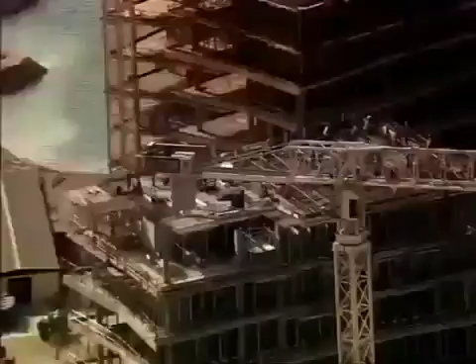Abu Dhabi, the richest city on the planet. It wants to join the City Super League and is undertaking an incredible transformation, building this extraordinary skyscraper, Aldar HQ. Nothing like it has ever been attempted. It'll be a race against the clock. Will this megastructure push even Abu Dhabi to the limit?

Abu Dhabi is in the midst of a construction boom. It's the largest of 7 sheikhdoms known as the United Arab Emirates. Its capital, also called Abu Dhabi, is the richest city on earth. Its ruler, Sheikh Khalifa, has a cool $875 billion in the bank and an audacious spending strategy to match. He wants to transform the skyline and compete with the international elite of London, New York, and Hong Kong.

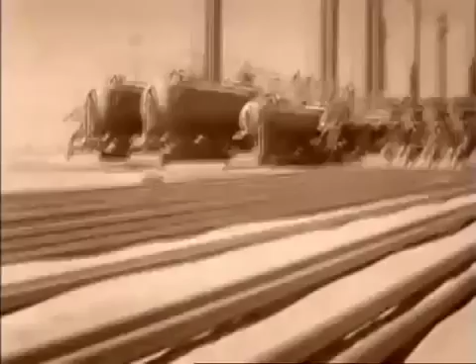But this is not the first time the Emirate has stood at the crossroads. Just decades ago, Abu Dhabi was a desert backwater, until the discovery of oil in 1958 brought unimaginable riches to its ruler, Sheikh Zayed. As the petrodollars flowed in, he converted the shell houses into high-rise, and the traditional way of life was swept away.

Today, Abu Dhabi is a thriving metropolis, sitting atop the world's 5th largest oil reserve. But black gold alone cannot put this city in the Super League. To do that, Sheikh Khalifa must lure big business and tourist dollars. Abu Dhabi must expand to thrive.

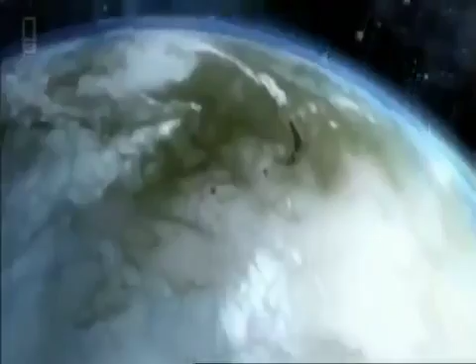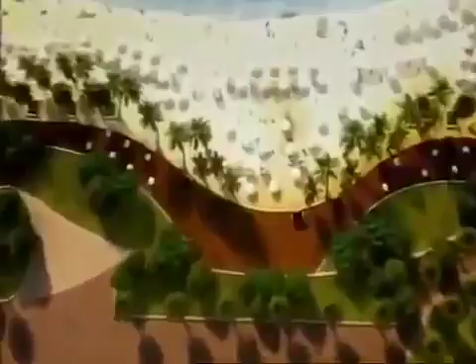To put Abu Dhabi on the world map, fledgling property developers Aldar plan a whole new micro-city, Al Raha Beach. It's an ambitious proposal. At 11 kilometers long and almost a kilometer wide, this city on the sea will be the biggest project ever attempted in Abu Dhabi's history. Mohammed Al Mubarak is in charge of delivering this audacious development. The vision of their highnesses and the vision of Aldar was to create this almost mini city where people can live, study, play, and work in one destination.

Al Mubarak must attract investors if Al Raha Beach is to succeed. So to launch the project, he commissions a signature skyscraper. Creating an iconic structure on Al Raha Beach was of vast importance in basically putting Al Raha Beach on the world map. Al Mubarak sets Lebanese architect Marwan Zgheib the task of designing an icon that raises the stakes even higher. The building will become Aldar's headquarters in the heart of their colossal development.

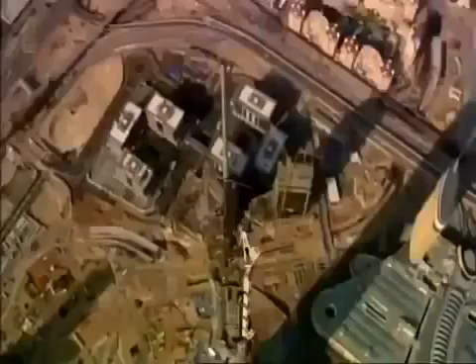But creating something new in a land where the iconic is the everyday won't be easy. Neighboring Emirate Dubai has taken center stage with a number of headline-hitting projects. The world's tallest skyscraper, Burj Khalifa, the Palm, and the World, and the emblematic Burj Al Arab. To stand out from the crowd, Zgheib knows he must redefine the extraordinary. Simple can be powerful sometimes, and especially in architecture. You can see it since the pyramids of Egypt. Most of the iconic buildings are very simple buildings.

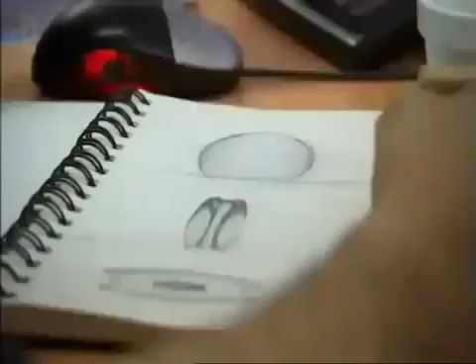But it isn't until Zgheib is relaxing on a plane that he has a brainwave. But I couldn't sleep, so it was a moment of relaxation, you know. And then the idea came simply. So I took a pen and I drew it on a sketchbook. The design is simple but daring. A round skyscraper taller than the Statue of Liberty, with a curved glass skin covering the area of 4 football fields. To be honest with you, the moment I imagined it, I knew it was a winning concept. I knew it was something different.

In fact, the design is so unusual, Al Mubarak initially doesn't know how to react. When I first looked at the MZ design, I was a bit confused in the beginning, to be honest with you. I felt like I was looking at a comic. I felt that this was a flying saucer and basically it landed on Al Raha Beach. And I just kept on staring at it for like another 15 minutes. And after 15 minutes, I just fell in love with it.

Zgheib's design is inspired by nature. 2 giant circular curved walls of glass mirror an open clamshell. Architecture is nothing but imitation of nature. At the beginning, the idea was so geometrical, very pure. It's like a seashell. The seashell has deep meaning for Abu Dhabi with its seafaring heritage. But a circular design poses a problem. Just like a coin that stands on its edge, it risks being unstable. The circle must be balanced.

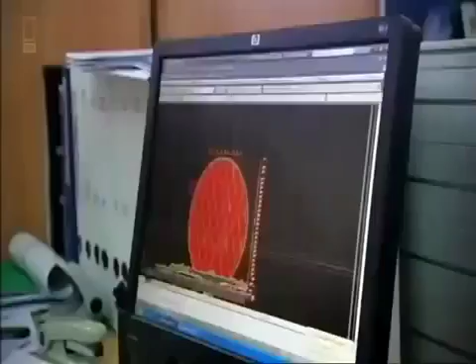So Zgheib turns to some very old-school geometry. The real challenge of the circular facade was to find the 2 points where the building should pose on the ground. And for that, I had to go back to one of the oldest rules in architecture, proportion. When you have a circle, you can divide it into a pentagram.

And that pentagram, in fact, is a representation of the cosmic body of the human being. So you can put a man in that pentagram, the man and the universe. So the pentagram will define the 2 points of the circle where the facade will lay on the ground. And this will create the perfect balance.

It was the same thinking that led 16th century philosopher Heinrich Agrippa to draw man as a pentagram inside a circle, and has helped architects to proportion buildings for centuries. But it's not the skyscraper itself that poses the first major challenge. It's the proposed site. They wanted to show me the site, but all you can see was the sea, nothing but the water.

Unbelievably, the solid ground required for Aldar HQ does not yet exist. The desired location is 700 meters out in the Persian Gulf and 8 meters underwater. New land must be created. Over 3 million cubic meters of sand must be found. Surely a simple task with Abu Dhabi's endless desert dunes. But desert sands are too fine to build with. The land would just slide into the sea. Marine sand is needed. Its larger grains help it stick together, creating the perfect base to build on.

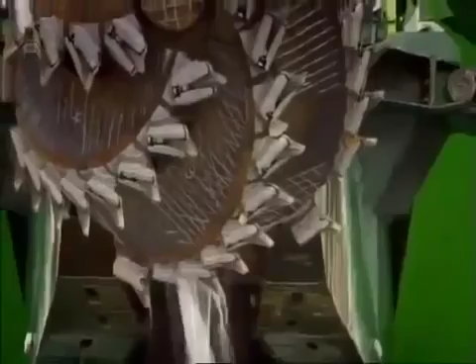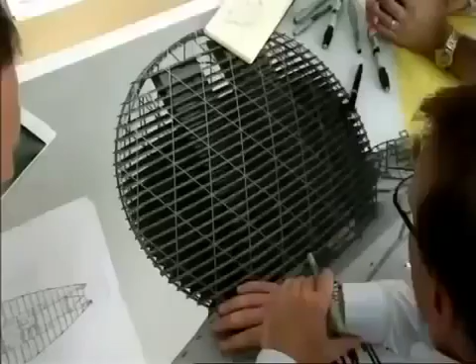We mapped out the program and I realized that basically from this blank sheet of paper we would have to start piling within 1 month, which is absolutely unprecedented for any building, but certainly a building which is of a unique geometry. Aldar want their skyscraper completed by an astonishing deadline. In just 30 months' time, the eyes of the world will be on Abu Dhabi when it hosts its first Formula One Grand Prix.

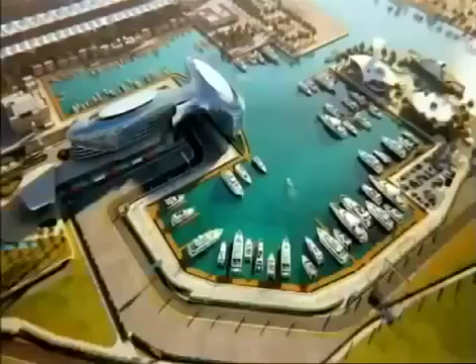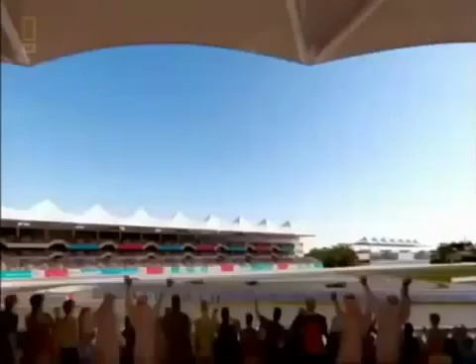The racetrack will be on its own designated island, complete with hotels and theme parks. And Aldar are building the lot. The international press and tens of thousands of visitors will descend on the city. It's the ideal opportunity for Aldar to showcase their new HQ. But to stand any chance of meeting this target, the team will have to pull out all the stops.

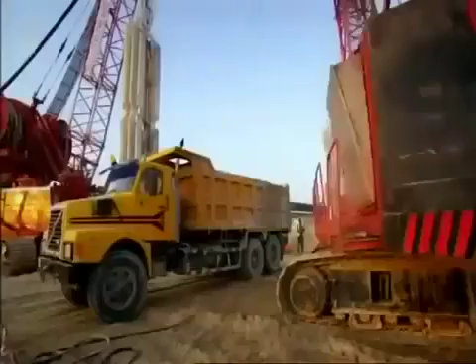Just 1 month after design has started on Abu Dhabi's round skyscraper, the construction team arrive on site to begin foundation works. For construction manager Miles O'Sullivan, the schedule is a shock. With the design not complete and being told you're going to pile in 1 month, almost crazy. But it's not just the first deadline O'Sullivan has to worry about. Aldar HQ's round curved shape presents an enormous sail-like area when wind strikes. Wind tunnel tests must be done to prove the foundations can take the strain. But the results won't be back until work has already started.

Abu Dhabi is regularly hit by high-pressure winds that sweep in from the Persian Gulf. But building Aldar HQ so close to the sea will put the foundations under another kind of pressure. Digging for Aldar HQ is very similar to digging here in the sand. What you get as you dig down is you'll get to see the groundwater starting to surge through the sand. And in fact, it's that groundwater coming through the sand here that's creating the pressure and obviously creating the issues for us when we do the construction.

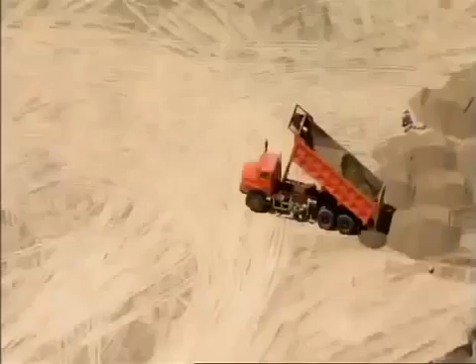The upward pressure of the water and the loose sand pose a problem for foundation construction. Before excavation can begin, the team must build a solid barrier called a diaphragm wall or D-wall. It's a concrete barricade formed of interlocking panels which socket into the bedrock and reach 16 meters below the surface. The D-wall holds back the loose sand and the surging seawater, ensuring the ground inside the barrier can be removed. These areas here, what are these?

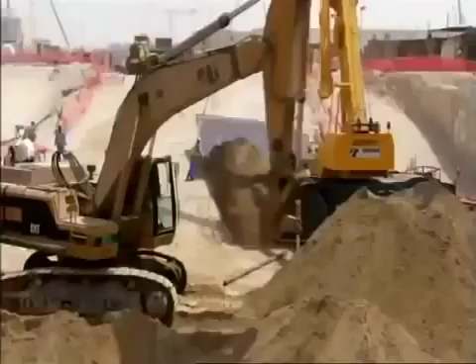The D-wall must be built before the foundations can be laid. But with the blueprint above ground a work in progress, the team can only hope that over-engineering the foundations will make them strong enough. The design calls for about 400 concrete piles that work in 2 ways. Half of the piles rely on friction with the ground to secure the structure to the rock and sand below, whilst the remaining piles drive deeper into the rock to dissipate the building's immense loads into the ground. On site, D-wall construction begins. It's the same process ongoing at this Abu Dhabi construction site.

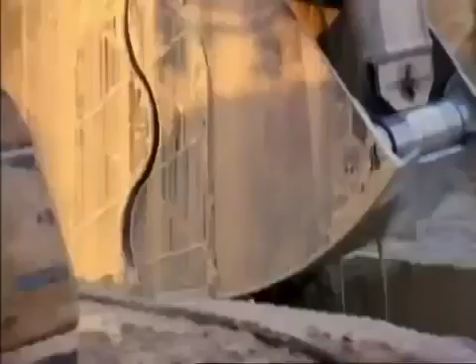Until recently, Al Raha Beach was just a vision for Aldar's Mohammed Al Mubarak, but the dream is slowly emerging from the sea. Seeing that land come up, seeing the amount of work and the amount of staff we had on the ground to make sure that was going to be done, that was like watching Rome being built.

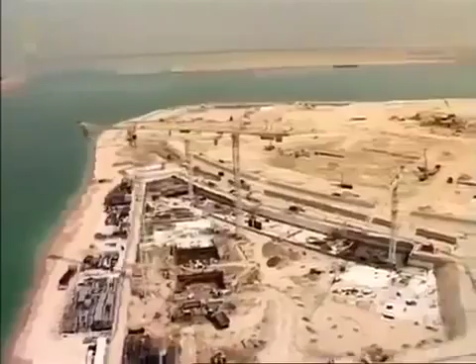The D-wall and concrete piles create a firm foundation upon which to build Aldar HQ. But the force of the sea pushing up through the sand still poses a threat to the skyscraper.

A great way of demonstrating the problems we faced at Aldar HQ with the groundwater is in imagining that this bottle here is Aldar HQ. And as I push the bottle down, you'll see forces are exerted on my hand. And in fact, that's the groundwater trying to push the building out, trying to push Aldar HQ out of the building site.

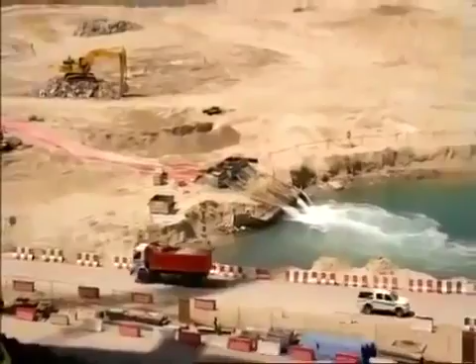To keep the site dry during construction, water is sucked out of the sand and pumped out to sea. But that's only a short-term solution. To protect this skyscraper in the long term, the team need an extra defense. It's a giant slab of concrete called a raft.

It creates a barrier against surging water, stops the piles from punching up through the building, and acts like a snowshoe to evenly distribute Aldar HQ's 59,000-ton weight into the ground. Raft construction for Aldar HQ is 12,000 cubic metres of concrete, which is a 30,000-ton structure. It's a huge element.

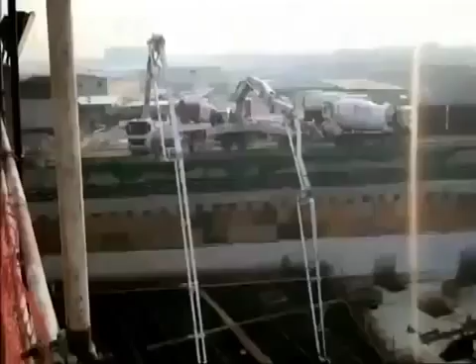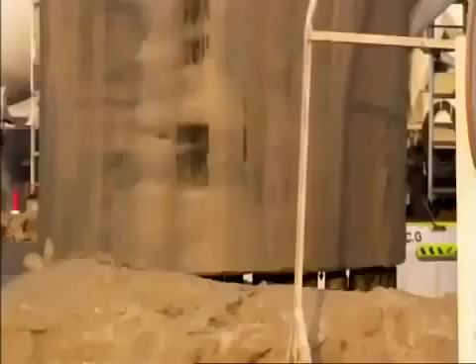With 2,000 truckloads of concrete to pour, it's a job that continues into the night. But engineers are just getting to grips with the severe forces that will affect the piles. The unique shape of the skyscraper will capture wind like the sail of a yacht. There are no guarantees the foundations will be strong enough to cope with the loads.

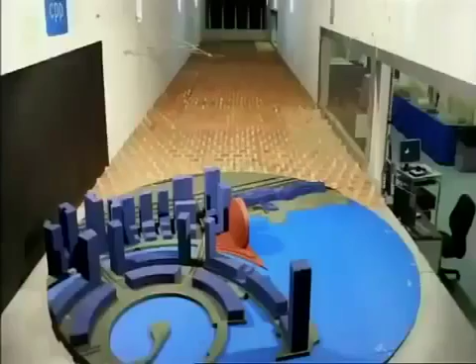The advanced construction works had to commence so quickly that we didn't have time to do the wind tunnel test. It was important that we did one, primarily because this is a unique shaped building. Gibbons calls upon wind engineer Roy Denoon in Colorado, USA. He puts a scale model of the HQ through its paces in his high-tech wind tunnel.

Right at the start, Craig Gibbons actually called me and said, "We've got something really unusual coming up. Can you take a look at it and give us your first best guess of what the wind loads might be? Give us some guidance on how to get to some loads for the foundations, because this is running on such a fast-track schedule." Knowing that Gibbons is already building the foundations, Denoon wastes no time in firing up the fans.

If the tests reveal the wind loads are higher than predicted, the foundations already in the ground may have to be redesigned. To be putting in the foundations before we could finish the wind tunnel testing, that always gives us a little bit of cause for concern. Denoon is right to be worried. He knows how high-altitude wind impacts on very tall rectangular skyscrapers. But Aldar HQ's lower height means another type of wind is the threat.

When we look at the really extreme wind speeds in the Middle East and in this region, we find that the highest, what we call gust wind speeds, the short events, are caused by thunderstorms. Abu Dhabi may appear sun-soaked, but during the spring, the intense sun heats the moist air, causing spectacular thunderstorms. Wind speeds can escalate up to 137 kilometers per hour.

The key issue with thunderstorms in this region is that they give the absolute highest gust wind speeds. Now, for the very, very tall buildings, that's not too critical because they occur down low. For Aldar HQ, they were really critical. Thunderstorm winds are strongest between 50 and 150 meters above ground. Aldar HQ is right in the danger zone.

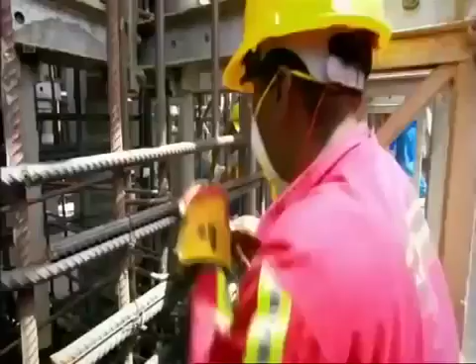Reinforced with 6,500 tons of steel, these cores will transfer the loads into the piles. But to channel these forces safely, the concrete must be cast without any flaws. They need a way to build the cores as two single pieces of concrete. The answer? To slip form.

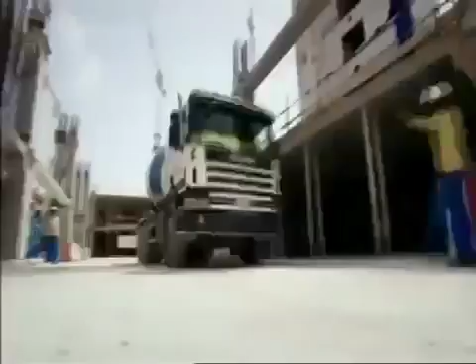It's a clever way to build big concrete towers. Liquid concrete is poured into a giant mold, which forms the shape of the structure. The mold slowly climbs up the core as it's cast, forming a single concrete tower without any joins. Seamless concrete will ensure the HQ's cores are strong. But these 125-meter backbones must be built in only 6 months.

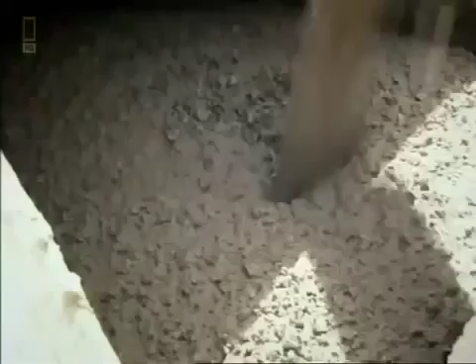It's the same process ongoing at this Abu Dhabi construction site, led by the Aldar HQ team. We are calculating how much per hour we need to climb, and then how much concrete we need to place in every hour. Slip form is fast, but on this schedule it's not fast enough. O'Sullivan has a trick up his sleeve to speed up construction. We set a challenge to both cores, who could get up there first.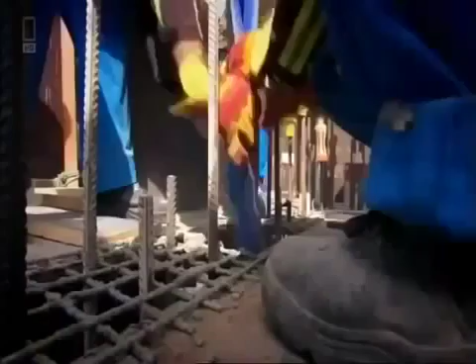The teams battle to reach each level before the other. The cores grow meter by meter under a constant cycle. The concrete is released and poured around the steel reinforcement. Hydraulics anchored to the structure raise the mold or shutter so that the next layer of concrete can be poured.

Manpower is a key focus because slip forms are very labour intensive. You need to make sure that the guys are on deck, they're there at the right time, they're doing the right works. 4 months into core construction, the two teams are neck and neck in the race to the top. Core 1's team leader keeps a close eye on Core 2's height.

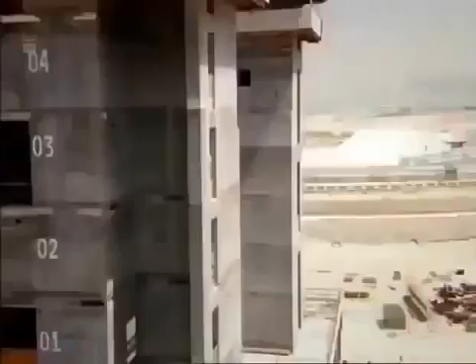It's been my benchmark, so if I'm doing better, I'll be ahead of them. So a lot of pressures are there. My boss is telling me, do this, go up, go up, go up. But it's good, the pressure is good. Core 2's leader also feels the strain. I'm working 24 hours today. I try to finish earlier than the other core.

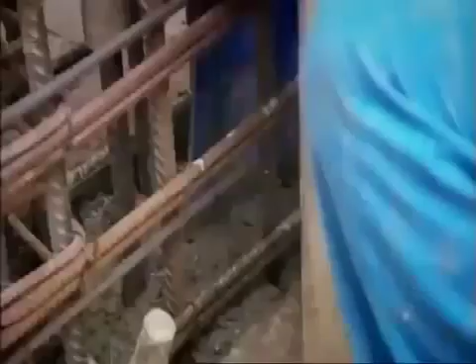Every month, the builders pour enough concrete to fill 1.5 Olympic swimming pools. But the teams aren't home and dry yet. There's still a challenge to finishing. Cores are renowned for going up quickly and sometimes having problems, so there's a lot of coordination effort that goes in to make sure that they do go up on time. We had structural steel elements to cast in. We had crane connections to get right.

After just 6 months, the two cores are approaching the top. Core 2 is only a meter or so behind, but Core 1 push ahead to victory. Core 1 won the race. It's really good to know that we're on top. For O'Sullivan, the contest to build the cores in record time has paid off.

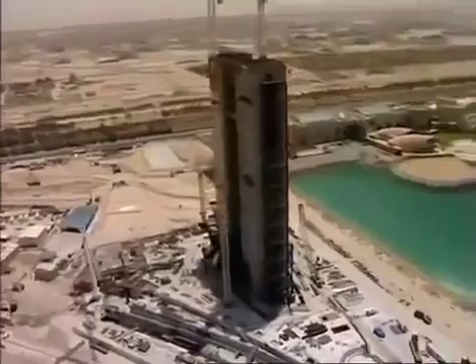A lot of planning goes into the cores. To see it come off, a fantastic feeling. But it's only a stepping stone, the core construction. There's a lot more to go on. The team have so far overcome the obstacles to bring Aldar HQ to life. But now they must face their most complex challenge to date.

1 year in, and Abu Dhabi's radical skyscraper is beginning to take shape. But with only 19 months to the deadline, the engineers must crack how to build Aldar HQ's vast external shell.

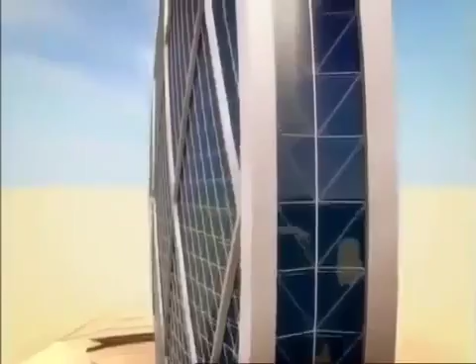The design demands a heavyweight shell to support its wide girth and survive huge wind loads. But the architect stipulates open office space, floor-to-ceiling windows, and panoramic views of the Persian Gulf. In the United Arab Emirates, the shells of rectangular skyscrapers are built with concrete.

But the geometry of Aldar HQ's shell is so complex, it must be built with the precision of a Swiss watch to fit together. On this scale, achieving millimeter accuracy with concrete is practically impossible. We knew at the outset a wholly concrete building was never going to work in this instance. And Stuart, I understand that now we've been able to get a high degree of repetition through. And there we go. The engineers need another solution.

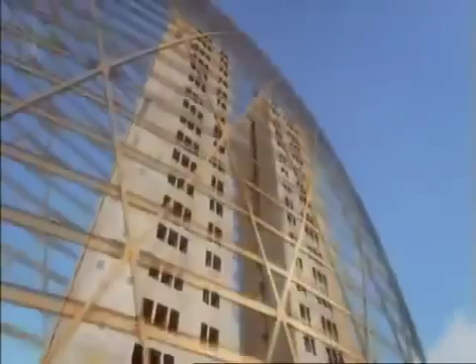The answer? A specialized steel exoskeleton called a diagrid. It's a muscular but slender steel frame that will form the HQ's unique shape and will channel forces through its high-strength beams and joints into the cores. Steel is very strong as a single element, but meshing them all together gives us this added strength and also allows us to make these rather unusual shapes.

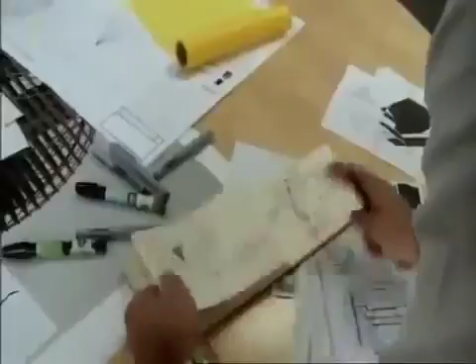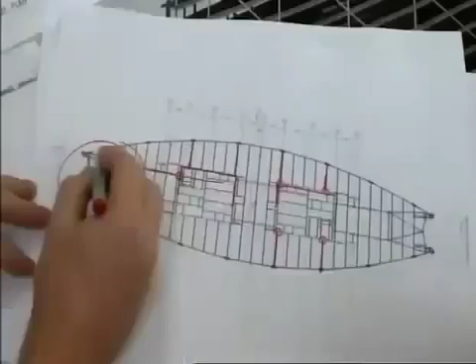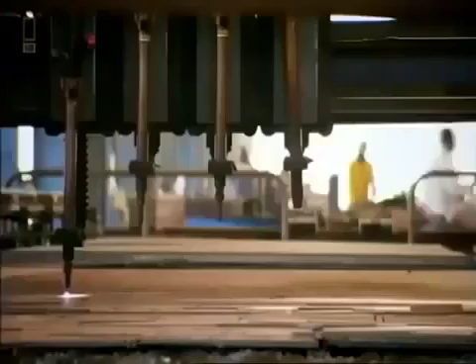It'll take expert steel fabricators to pull this job off. When we first saw the design, it was something that we knew we had to put our most experienced guys on. The structure's very, very complex. The army of fabricators work in shifts around the clock to cut and weld 2,500 tons of steel. The factory is building a series of A-shaped steel sections, weighing up to 30 tons each. They will connect together to form the structure's signature curves.

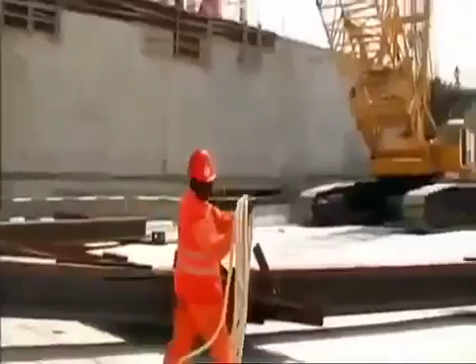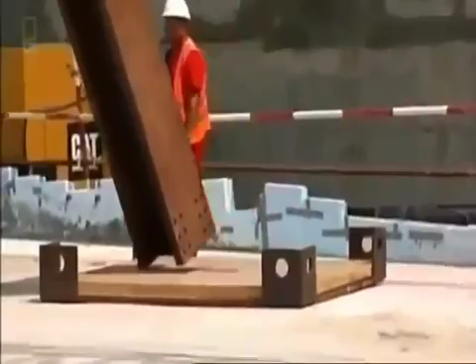But if manufacturing these giant A-frames is not a big enough job, lifting them into position on site will be a major challenge. Great to see the steel arrive for the main diagrids, the main columns to the structure. Huge sections. The thought of actually starting the steelwork some 18 months after we started the job, fantastic. But excitement of the first A-frame delivery is soon replaced with trepidation. Lifting these monsters will be a precision job, and tensions run high.

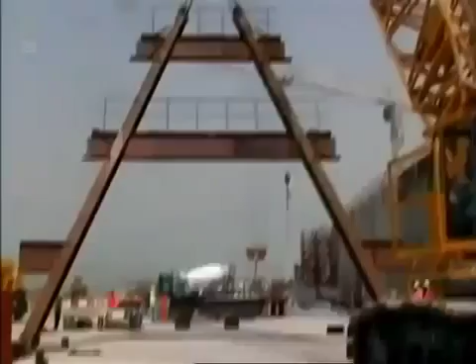When we rigged the first A-frame up, you've got to put all the chains on it. It would take maybe an hour to rig it up, and everybody's then thinking, I hope this is going to work. Everyone is on tenterhooks. Now is the moment of truth. The A-frame is lifted off the ground. There was a big ah from the crowd when it went in. The first exoskeleton section is finally bolted to the base plate. To see one go in, an amazing feeling. First A-frame up. Again, a milestone achieved, but then a lot more to go.

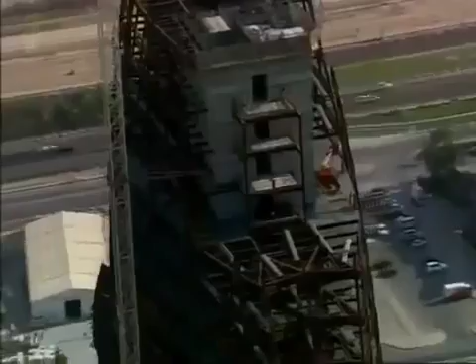Another 99 A-frames must be fitted to form Abu Dhabi's unique skyscraper. The handover date is now just 19 months away. So the team must now focus on the HQ's interior. The structure needs an alarming number of restrooms, 85 in total. This is no weekend DIY job. It'd take an army of plumbers and time the schedule cannot spare. So to fast-track the task, the team innovate again with prefabricated washroom modules, or pods.

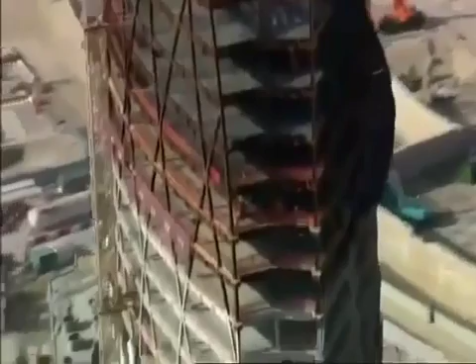A pod is a factory-made restroom, complete with lavatories, basins and mirrors, ready to plug into the building. The team plan to lift these 12-ton pods by crane and lower them into the cores like a giant game of Tetris. Construction is a finely tuned sequence. The pods have to be in before the exoskeleton blocks access to the cores.

Aldar must approve the design fast, but there's a problem. We produced a lot of visuals and graphics which we had signed off. Then we actually built the pod. We went to look at it at the factory and a lot of people thought that's it. But Aldar unexpectedly rejects the pod design. It's just too ordinary for such a futuristic skyscraper.

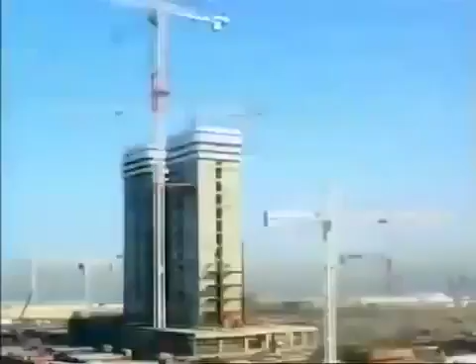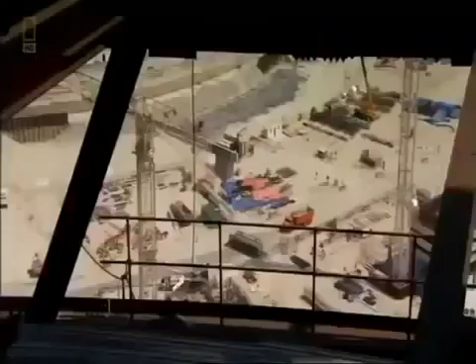It will take months to remodel, and the exoskeleton can't wait. The whole plan could go down the pan. The only option is to leave out 2 roof sections and drop in the pods later, but this has its own dangers. With zero hour looming, the team must now wrap the building's skeleton with a glass skin. And no one has ever built a glass facade like it.

The geometry of Aldar HQ is highly complex. 2 giant bowed facades cover an area the size of 52 basketball courts. A third narrow surface joins the round facades like a zipper, arcing an extreme 290 degrees from one side to the other. But curved glass like this doesn't exist. The engineers need another plan.

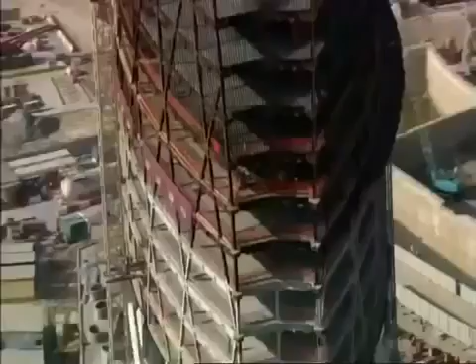The secret to covering a curved surface with flat glass is its shape. Square glass isn't an option. Squares can only bend in one direction at a time without distorting. Aldar HQ needs triangles. They can pivot on 3 axes and seamlessly join with their neighbors. To form these complex curves, it'll take 25,000 individual panes.

But before glass production can begin, the team must know what wind pressures it will face. It's back to wind engineer Roy Denoon, who must test the design in his wind tunnel. When we first saw the design, we knew there was some potential for some quite high glass design pressures. If you under-design a pane of glass, then it will be sucked out the building. The large facades are most likely to cause trouble.

The biggest loads on the overall building are the winds coming flat into the wide face, so it's capturing it almost like a sail. The wind comes into the centre and spreads out around the building, and where it separates and splits away from the building around the edges, that's where we see the largest pressures. The pressure is like a big SUV hanging off the outside of each panel.

But that's not all Denoon's test reveals. The circular shape of Aldar HQ creates another problem. When we initially saw the design, the sharp edges threw up this warning flag that said, look, we can get some pretty large pressures here. Where the wind hits the edge of the narrow strip of glass, it spirals in on itself, creating a vortex.

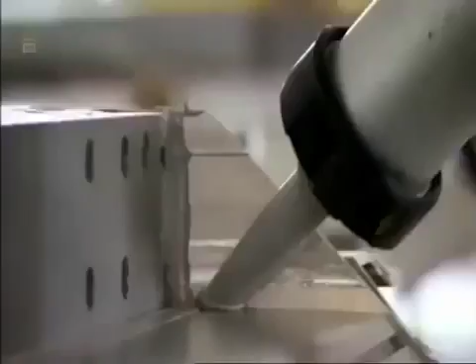But that does nothing to limit the scale of the job ahead: installation. You talk about 25,000 pieces of glass. To do that for the building in 10 months, it's a monumental effort. It's a constant battle, making sure that you get the glass to site. But having the glass factory on site is a lifesaver. It made it easier for the site to actually call up on glass.

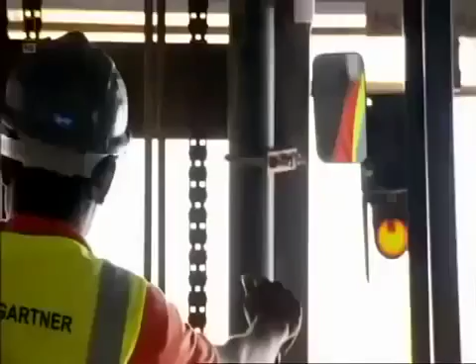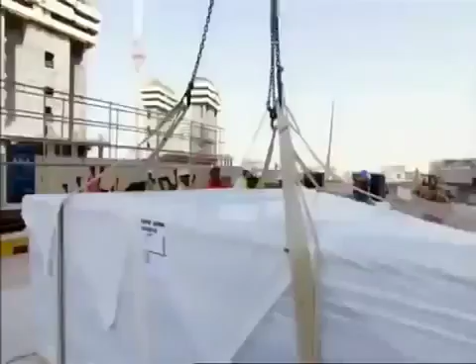Once they were installing the panels and they ran out of glass, we're immediately on the phone: hey, we need more panels over there, so we got them on a truck, and 5-10 minutes later they were on the site. The glass factory sends the panels to the site by truck, and the panels are lifted by crane up to the installation team. The constant pressure was the program. The glass is pulled onto the floor plate, but it takes a team of 8 specialist riggers to install the panels.

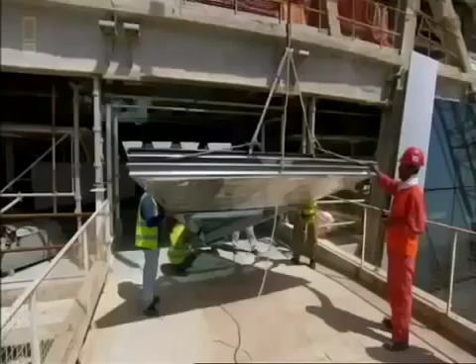Probably the hardest thing was the sheer volume that had to be installed. Fixing glass on a curve at this height means the panels have to be swung out from a platform that hangs out of the building. It should be easy, but then this team have Abu Dhabi's wind to contend with. The wind here can just blow in from nowhere. It caused us no end of problems. The glass would start to revolve and spin.

We would get a choice whether to lift it, bring it into the building, put it down, or to put it straight back down on the ground. They were decisions that had to be made on the spot. And you don't want a large panel coming down from 20 stories. Just contemplating that, it doesn't bear thinking about.

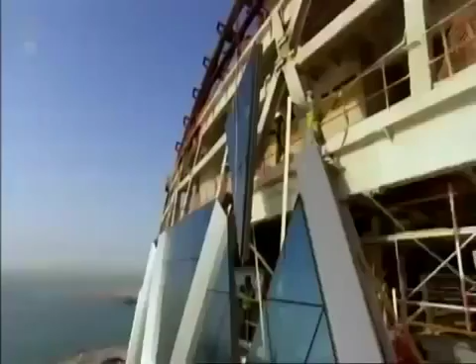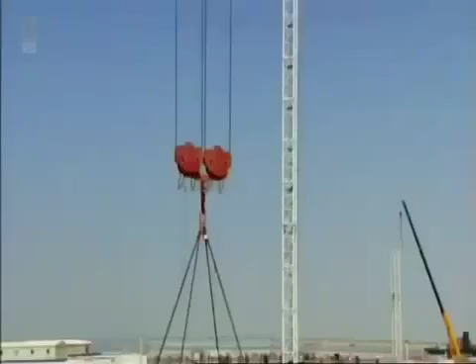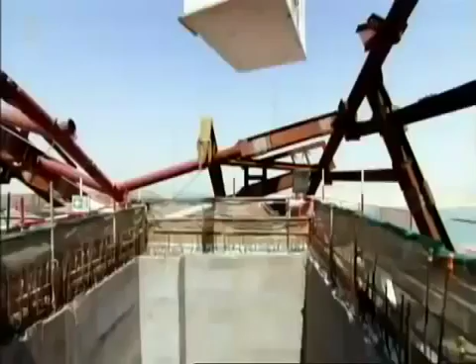The new design is finally approved, and after 10 months, the 12-ton modules start to turn up on site. The pod drops are quite quick. We hook them up, we take them up the 140 metres to the top of the tower crane. The pod can now be lowered into the core shaft. It's a tight fit with just 75 millimetres of clearance.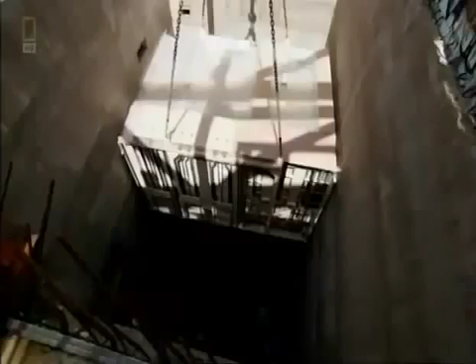When I saw the first pods in, it was a relief that that saga was over and we'd actually managed to achieve what the client wants. The pods are on the move, but the long delay has serious consequences. Finishing the exoskeleton should be a straightforward task, but the incomplete steel roof has sagged out of shape.

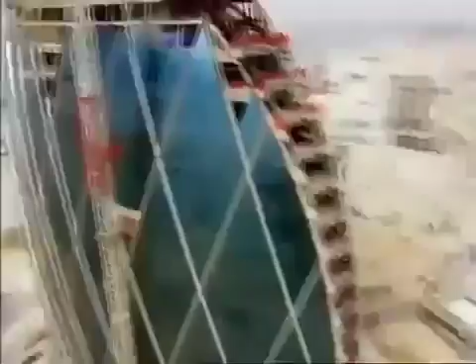Eight months from the deadline, and the world's first spherical skyscraper is fast approaching completion. But with the end in sight, construction hits a serious snag. The delay in fitting the washrooms into the cores has forced the team to leave the roof arch open, causing the steel to slouch out of shape.

The arch of the HQ's lightweight roof is the key to its strength. Its curves evenly distribute the forces down into the foundations. But if any elements of the arch are missing, the forces cannot flow away. The roof will sag under the weight. To discover how serious the slump is, the steel is surveyed.

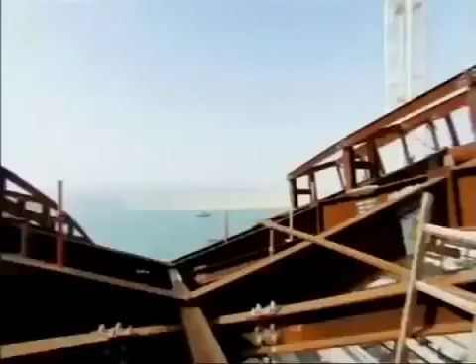I made a phone call to our site supervisor, Bob, and asked the question of what the actual sag was recorded, expecting it to be around about 50, 60 mil. When we got the figures of 150 millimetres, I was a little bit shocked. With a building that relies on precision engineering, a 150 millimetre sag is a huge problem.

The roof will not slot together. The brackets to connect the remaining 40 glass panels will be out of alignment. There is no time to redesign. The team have to somehow make the roof steel fit together. The only way is to lift the entire roof into position, and it weighs a staggering 200 tons.

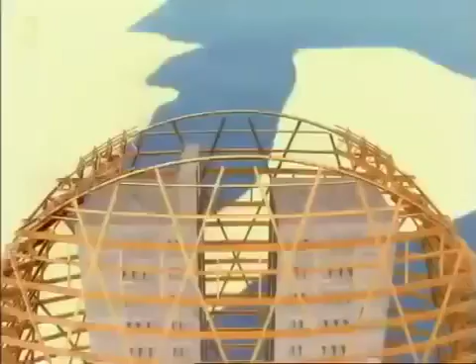Even for experienced steel engineer Bob McPhee, this is a serious undertaking. I hate it when you start waking up thinking about your work. I've never liked to do that. To lift the roof arch, 2 hydraulic jacks are positioned on top of a load-bearing wall, carrying 80 tons of weight into the core.

2 more jacks are propped with 16-meter-tall steel columns and channel 40 tons each into the concrete floor of level 23. The props are packed with steel slabs to hold the roof in position as the jacks are raised. The roof was moving firstly a couple of millimeters, then 5, then 10, then gradually into its position 20, 50, 100, and then into its final position 150 millimeters.

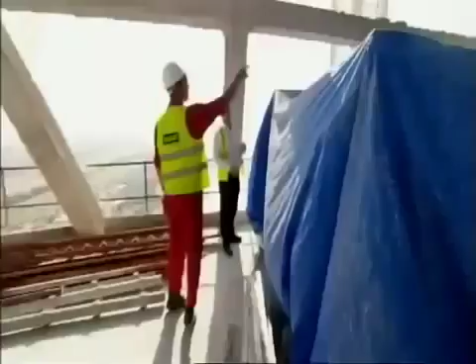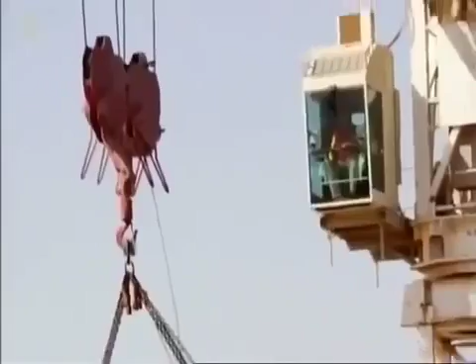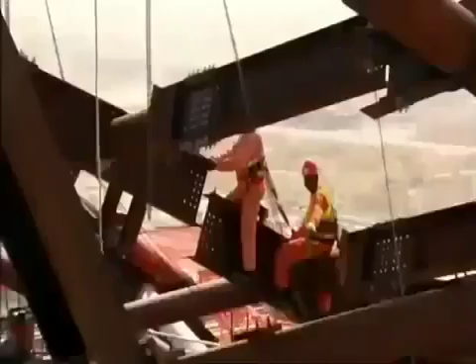The entire roof is raised by a whopping 150 millimeters. The slumped arch is finally in the right position. All that remains is to lift the last steel section. It's a tight fit. With a millimeter to spare, the roof is finally complete.

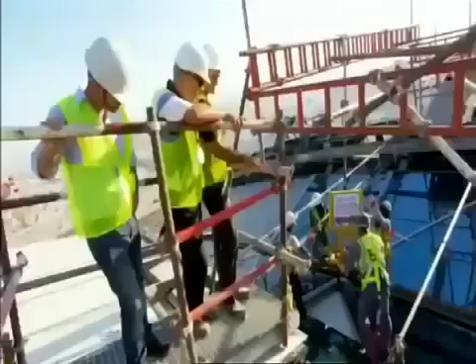With just weeks to spare before Abu Dhabi's first Formula One motor racing spectacle hits town, all of Aldar HQ's 25,000 glass triangles are in position, except one. The glass installation team lower the pane inch by inch. No one wants to be responsible for shattering the last sheet of glass. It's a defining moment for the team. Finally, the last pane slots into place.

Ecstatic. Actually see the last bit of glass go in. Amazing feeling. Hopefully the guys here feel the same way, and I'm just overjoyed. Against all the odds, and in just 30 months, the team have fulfilled their brief. An engineering triumph. This is Aldar HQ.

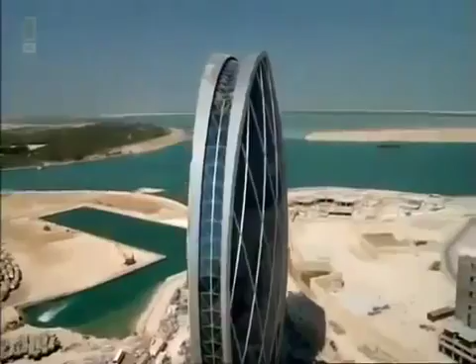This circular skyscraper, a world first, rises 110 meters above the Abu Dhabi sands. All 25,000 glass panels mirror the surrounding landscape, reflecting the blue skies and the rolling sea of the Persian Gulf. Amazing structure. You don't see any circles in the world being constructed, so to be part of that was fantastic. Mindful of all the issues and challenges and highs and lows in between adds to that feeling of triumph.

Mohammed Al-Mubarak fell in love with an extraordinary idea. But will the building match his high expectations? It is really a work of art. It's a stunning building. To me, it feels like it should be in a museum. The space is unbelievable. It's really a colossal building. When you come up front to it, it's even bigger than you even imagined. And for it to come from paper to that, it's great.

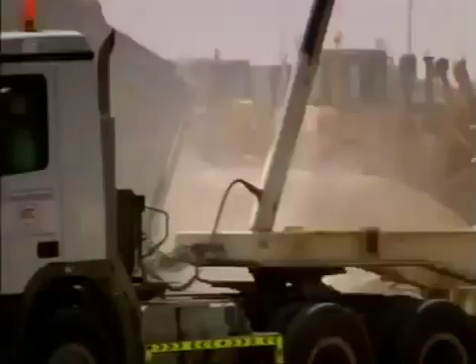Already an icon on the Abu Dhabi skyline, Aldar HQ should lay solid foundations for the future of Al Raha Beach. Architect Marwan Zgheib is delighted to see his concept sketch come to life. The building is more beautiful than the original idea because it's real now. It's no longer a simple concept.

It's become reality. Aldar HQ is a structure that rivals not just Dubai's iconic buildings, but can stand proud on the international stage. The HQ building has really put Abu Dhabi on the world map. If you ask me today, we're not yet into the world of Singapore or New York or Paris or London. Will we get there? I absolutely believe we will.